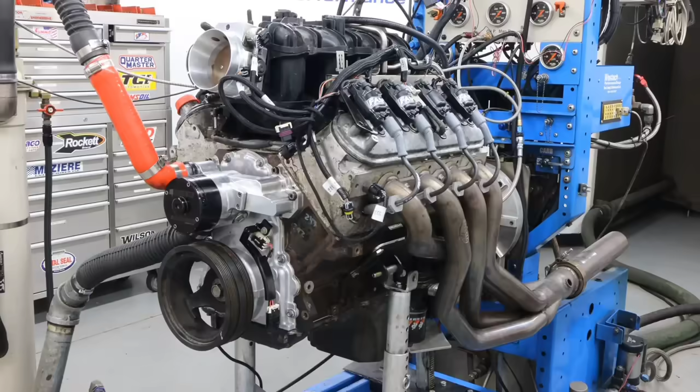A 6-liter LS and you want to modify it. Either you already have a 6-liter in your truck or you have one that you're swapping into something else. So the question is, what should I do? What mod should I perform? What cylinder head should I use? What intake should I use? And most importantly, what camshaft should I use?

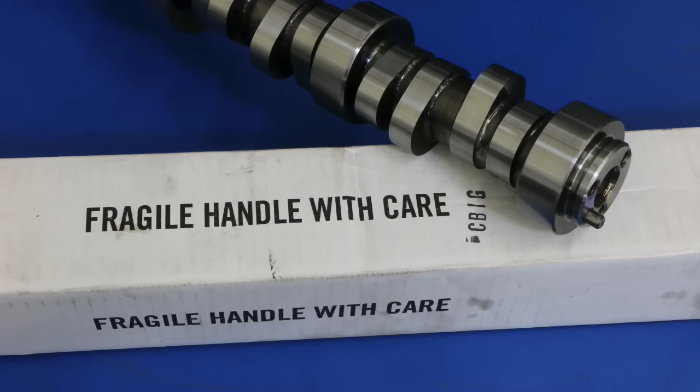How should I modify my 6-liter? Maybe we should do a build-up. How about a couple of different mods? How about 10 6-liter combos? In this video, we're going to take a look at no less than 10 different combinations.

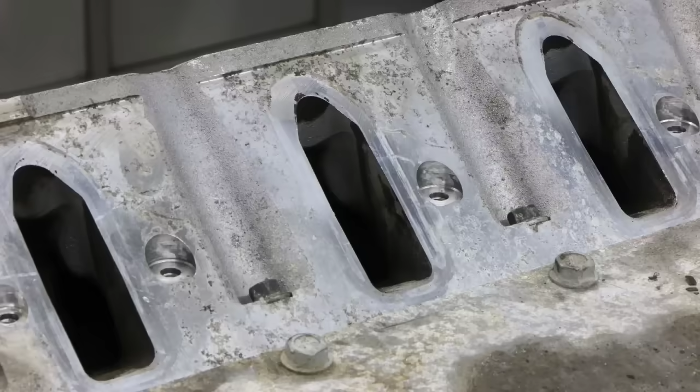I'm going to show you a variety of different cylinder heads that we ran on a 6-liter, a variety of different camshafts we ran on a 6-liter, and even a variety of different intake manifolds that we ran on a 6-liter. We ran Cathedral port heads, we ran RecPort heads, we ran Cathedral cams, we ran RecPort cams, we ran stock cams, we ran all kinds of stuff, so you can take a look at what you want to do to your 6-liter.

Now, obviously, the compression is going to be different on an LQ4 versus an LQ9, and even versus an LQ6. But the reality is, that's not going to change the results. Sure, more compression is going to add power, but it adds power both on the baseline number and on the modified number. So the results of a cylinder head test are going to be the same on a LQ9 because it has a little more compression.

I want to point out something very important here. A lot of guys think that compression works well with one specific kind of camshaft or one specific kind of cylinder head or intake manifold, and it does not. Compression is a lot like boost. It basically adds power everywhere, and we always use a percentage to show how much it adds, but the reality is that's just an easy mathematical formula. Compression adds power everywhere, no matter what camshaft you put in it.

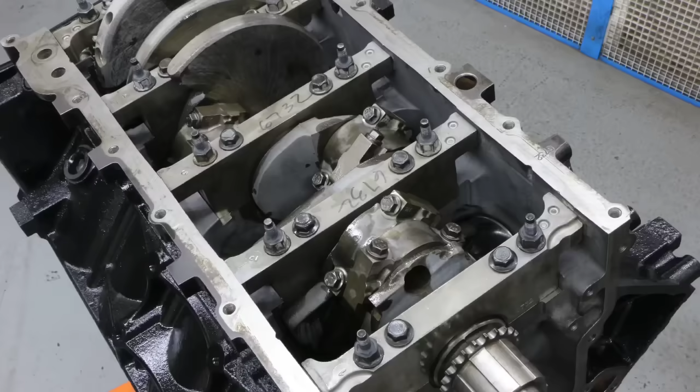If I compare two different camshafts on one motor that has 8-to-1 and the other motor that has 11-to-1, the camshaft change is going to be the same on both motors. It's just going to start out lower and end lower on the motor that has less compression, and it's going to start out higher and end higher on a motor that has more compression. So what I'm saying is we ran all these tests on an LY6 6-liter, but it applies equally well to an LQ4 or an LQ6. Let's get to our results.

To get things started on our upgrades to the 6-liter, we're going to start off with Cathedral port heads, and then for the next one we'll go into the RecPort head stuff, because obviously the RecPort head can be used on a 6-liter, which the factory did on a number of combinations. Now, as I indicated earlier in our discussion, it doesn't matter whether you're starting off with an LQ4, an LQ9, or in this case an LY6. They're basically all the same.

You'll see a minor difference in compression ratio for each one that you start with, but that will just improve both the starting power and the ending power of any of the modifications. The changes from the modifications will basically stay consistent. It just matters the starting point and the ending point. So we're going to start off this 6-liter.

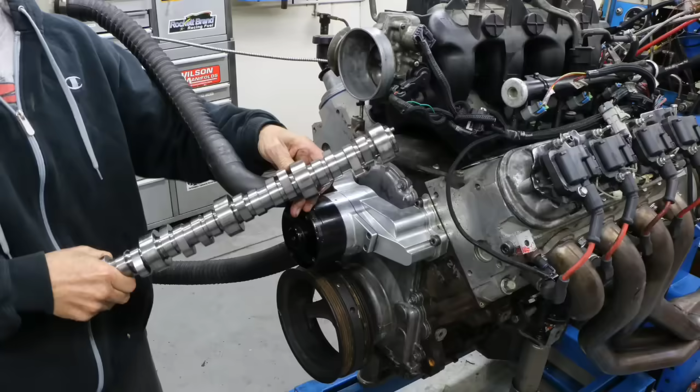It's an LY6 short block, and we have a cam in it because if you're going to modify a 6-liter, the first thing that you should do with any 6-liter, regardless of which one it is, if you want to get the most bang for your buck, is put a camshaft in it. Cam and springs are the big upgrade for any LS. That's what you should start with, unless you're starting with a turbo, which is also a good start even with a stock cam.

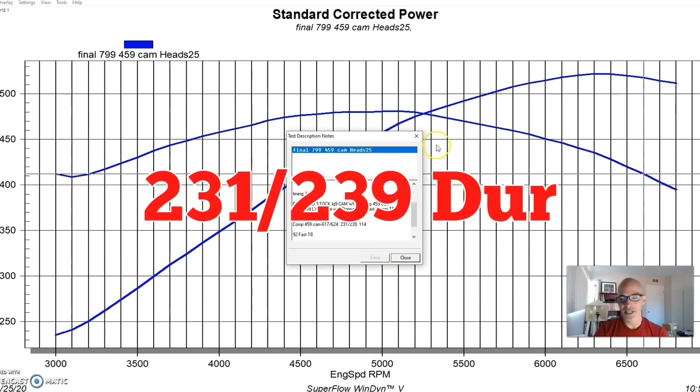But we set up this LY6 short block with a Comp 54-459-11 camshaft, and it's not the go-to 469 cam. It's the Cathedral port version of that, which is a .617/.624 lift split, a 231/239 degree duration split, and 114 degree lobe separation angle. So basically, it's the 469 cam, but with less exhaust duration.

And don't worry, I'm going to show you a comparison between this and the other cam, and it's not really very much different because they're both really kind of similar. So what we did was we got things started by installing a set of 799 heads. Now, the 799 heads, for guys that don't know, 799, 243, basically the go-to high-performance factory Cathedral port head.

These work really well, and actually on a 6-liter, and I'm going to show you the difference between the 799 and the 706 head, these might be as good or better choice than the smaller 706 head on this bigger 6-liter. So we ran this thing with 799 heads, and I put a Dorman LS2 intake manifold on it, which you've seen in any of my other videos or the stories I did on it.

The Dorman LS2 is basically the functional equivalent of a Trailblazer SS. It's just a lower profile and it fits. When I compare the two back to back, the whole power curves are almost identical. There's a little bit of wiggling here and there, but basically they're the same kind of thing. This Dorman LS2 works really well. We had a 92mm throttle body on it, 1 7/8" long tube headers, and tuned all of these combinations with the Holley HP management system.

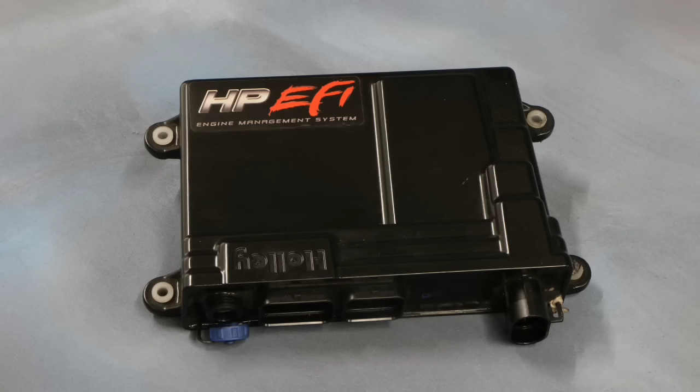So run with the stock 799 head. The only thing we did was put valve springs on it. No milling, no bigger valves, no porting, no nothing. Just an as-cast stock 799 head with valve springs on it. Run with those heads, our 6-liter produced 522 horsepower and 481 foot-pounds of torque.

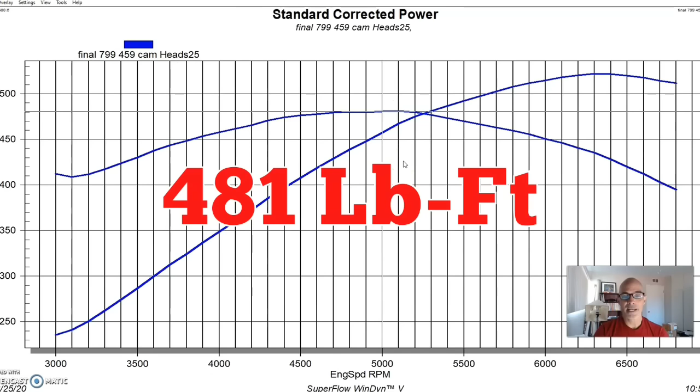So now I know what you guys are thinking. Okay, well, what if I had a 6-liter and I wanted to upgrade 317 heads, which, by the way, we should address the elephant in the room. 317 heads you should just get rid of unless you're running boost, and I'm sorry if I hurt the feelings of all the 317 guys out there. But in terms of all the factory heads, that's low man on the totem pole. Because of the compression, it makes the least amount of power of any of the factory heads, and you can see that in any of my other videos.

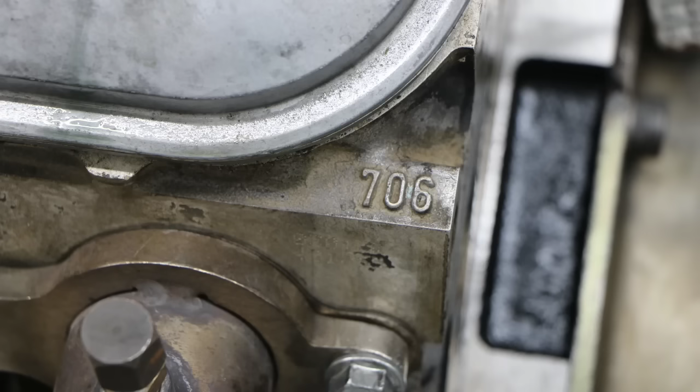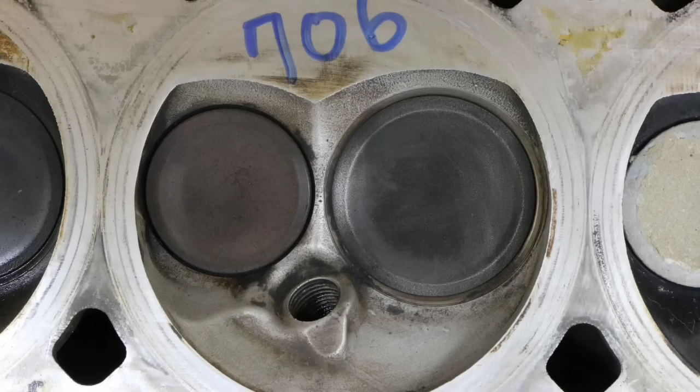So if you're going to upgrade that head, the easiest and least expensive choice is to put a set of 706 heads on from the 5.3, because people will just give those away. Although maybe not after all the videos I've done. But here's what happened when we replaced the 799 heads with 706 heads. So the 706 head made more power than the 799, up to about 5,000 RPM.

And out here at the top, from about 5,900 on out, the 799 head made more power, because on the 6-liter, unlike the 5.3, which the 706 head is a much better choice, on the 6-liter, the bigger bore and this power output, and that's very important, this power output can take advantage of the extra airflow offered by the 799 243 head. They flow a little more than the 706, and they work well on the bigger bore, so that combination allows them to make a little more peak power.

Although down low, they didn't make as much as the 706 head, and everybody points to compression, but we were only talking about around 3 cc's difference between these two heads, so this is not all compression. People need to realize that that's also a combination of the smaller valve size and the port volume and the chamber shape, and there are other things that make this 706 head enhance power in this RPM range.

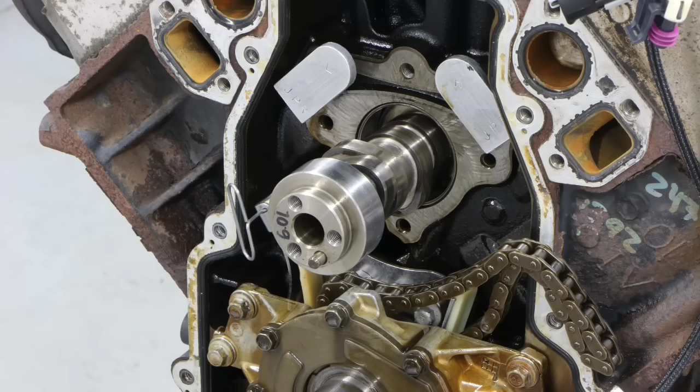So now let's take a look at the other modifications we did to our 6-liter. After comparing the 706 and the 799 heads, we'll get rid of our 706. So you're probably asking yourself, hey Richard, what happens if I want to upgrade the heads on my 6-liter? What can I do to improve the power output compared to a set of 799 heads? And obviously you could put more camshaft in this, although there's a limit with the available piston to valve clearance, and something in the 231 or so degree intake duration, which is usually the valve that's going to hit first, depending on the lobe separation angle and the valve events. You have a limited piston to valve clearance, so there's not a lot more that you can get from the camshaft.

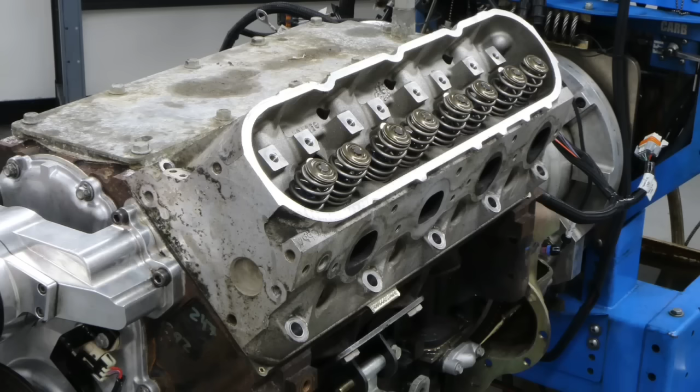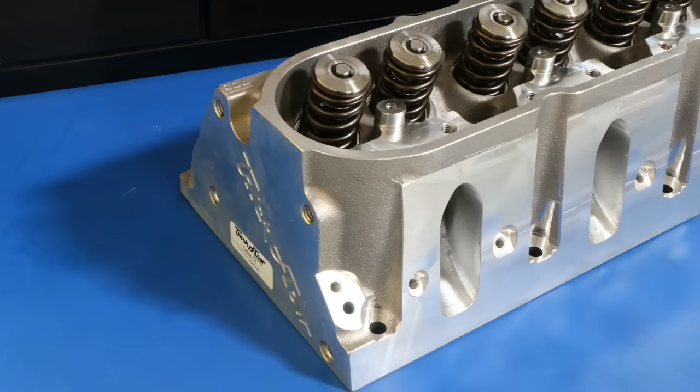So what happens if you upgrade the cylinder head on this? A natural upgrade for this would be to go to an aftermarket head, and what we did was put a Trick Flow head on it. So here's what happened when we put a TFS 225 head in place of the 799 head. And you can see we picked up quite a bit of power. Power output jumped from 522 up to 560 horsepower. And in this case, we ran the Trick Flow 225 head with the same Dorman LS2 intake and 92mm throttle body.

But here's another interesting test, and it shows the gains of an intake manifold when you're talking about this kind of power level. The factory intakes obviously were not designed to work on a combination that was making over 550 horsepower, although they're doing pretty well. And the Dorman version actually is pretty good. But here's what happened when we replaced the Dorman intake with a FAST intake and with these 225 heads. And as you can see, there were big gains starting at 4,300 RPM or so.

So if you're looking for that last little bit, the FAST manifold, I know it's more expensive than the Dorman, but not so much anymore. I think they've raised the price on the Dorman, and they're much more money. So I might spend a little extra and just get the FAST to begin with, especially if I was going to upgrade the cylinder heads.

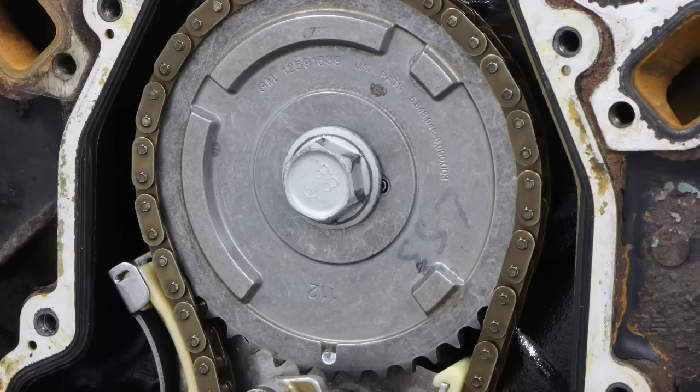So on these combinations, what I want to do is show you what happens if we did a little bit milder stuff, and then we can work our way up to a lot more camshaft. So the first thing I did was, what happens if I wanted to put an upgrade with like one of the stock cams? So what we did was put a factory LS3 camshaft in here. Let's see, here we go.

So equipped with the LS3 cam, the power output jumped to 475 horsepower, which is a fairly good gain, especially past 4,500 RPM, it picked up power. But compared to the factory LQ4 cam, it lost power down low, and we see that almost all the time. When I compare the LS3 camshaft to like the LM7 camshaft, we saw the same thing. It loses power up to about this point and then gains power afterwards. So you're trading power. So you guys have to decide, is that factory camshaft upgrade really what I want to do, or do I want to go to an aftermarket cam?

And here's what happened when we put the camshaft from Trick Flow in it. Basically, it was the sloppy stage 2 camshaft, so it was like a 228-degree duration. Here we go. So that was actually a good upgrade compared to that factory LS3 cam. The peak power jumped up to 513 or 514 horsepower. Peak torque was up to 493 foot-pounds, and it gained power even over that mild stock cam, even down as low as 3,000 RPM. So that's a fairly good upgrade if you want to pick up power everywhere. It picked up a good amount. We're over 500 horsepower, 514 horsepower.

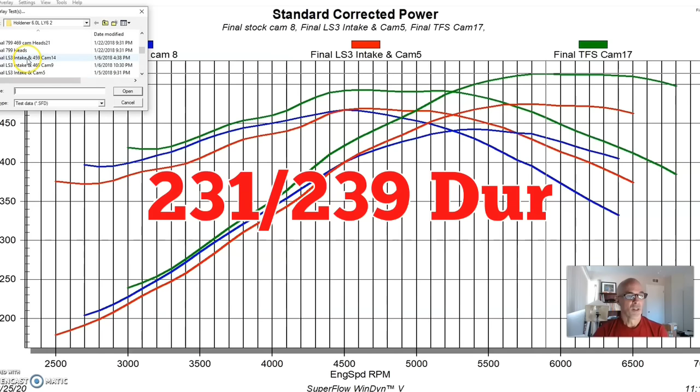But here's what happened when we put something a little bit bigger cam, like the 459 or 469 camshaft in here. So here's the 459 camshaft, and as you can see, big gains past 5,200 or 5,300 compared to that sloppy stage 2 cam. Basically big gains compared to the factory cam. It kind of fell below the factory cam below 3,500 or 4,000, but picked up power from 4,000 on out and ended up making a peak power of 541 horsepower. And here's what happened when, instead of the 459 cam, we put the 469 camshaft in.

And again, it did kind of what it did in the last test on the Cathedral port heads. It lost power down low here in the 3000 range, picked up power out here past 6500. Everywhere else, it was basically identical. So there's fundamentally no difference unless you're revving the thing way out or care about the idle quality and the low speed stuff. Then maybe the 459 cam is a better way to go.

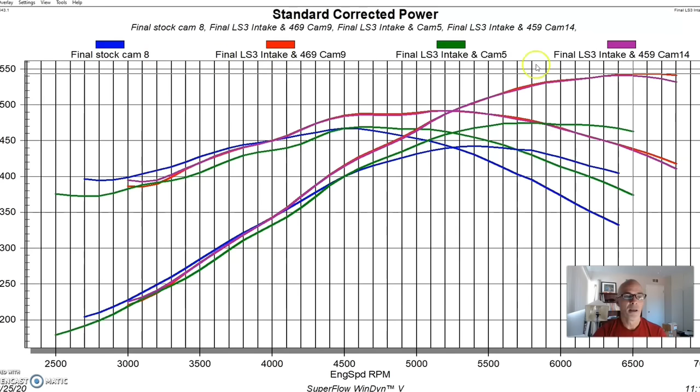But here's what happened when we ran. So this is what happened if you ran a factory LY6 or LS3 head upgrade on your cammed 6-liter, whether it's an LQ4, LQ9, or in this case an LY6, which in that case it's just a cam upgrade. But in the others, it would be a cam and head upgrade. And by the way, the peak power was 543 with a 469 cam. But now you're probably wondering, well, hey, Richard, how does that compare to the Trick Flow headed Cathedral port? Well, let's take a look at that.

And as you can see, the ultimate combination with the Cathedral port stuff with the Trick Flow head and the FAST intake manifold made 576. So it's still better than the factory rect port head. And here's the comment I always get when I run this kind of test, because I posted this before in another video: yeah, but what about if I put a FAST intake on the rect port heads? Well, unfortunately, the FAST intake on the rect port head does not gain power like it does on the Cathedral port head. In fact, it probably would show no gain at this power level on these rect port heads. So it would be the same curve.

The factory LS3 intake manifold or the LY6 intake manifold is really hard to beat, as FAST guys have found out. And that FAST LS3 just doesn't really add power there. So this is still a good comparison, because actually the Dorman intake, if anything, I think holds it back compared to the factory LS3 manifold on the other combination. The Trick Flow 225 heads are just a better head than the factory LS3 head is. Now maybe you could put a ported rect port head on there, especially one that was milled to have the right compression, then you could get that up to the standard.

But I'm not comparing those two things. I'm not telling you which one is better. I'm just showing you this is what they do, and these are the kind of power gains that you can get if you run these combinations, because they work very well. There's obviously more power to be had from the factory head, because we've made almost 700 horsepower, I think, with those combinations. So you can definitely get a lot of power out of it on the right combination. But here's what happens when you upgrade your 6-liter. Let's get to our conclusion.

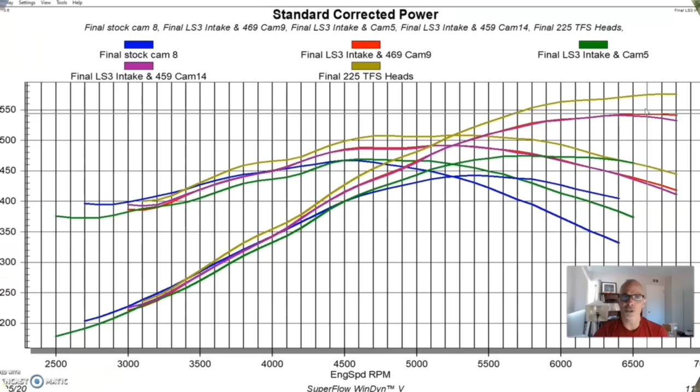Okay, guys, what'd you think about all those test results on our 6-liter LY6? As I said, you could apply that equally well to an LQ4 or an LQ9, but on the LY6, we did a lot of testing. We compared a bunch of Cathedral port heads and a bunch of rectangular port heads and a bunch of camshafts and a bunch of intake manifolds. Did you guys get any ideas for the stuff that you want to do to your 6-liter? Is there something I missed? Is there something else I should test?

Now, here's something important. I wanted to try a camshaft that was between that sloppy stage 2 and the 459 or the 469. You can just draw a line in between those two and pretend that we did that, because that's exactly what's going to happen. Same thing with the milder stock cams. If you look at videos I did on all of the stock cams on the 5.3 liter and you see the difference, that's going to be the difference on the 6-liter. It's just that the crossover point for some of these wilder cams is going to be shifted down a little bit in the RPM range. It works a little bit better on the bigger motor, and that's all that's going to happen. So all of these modifications should give you a good idea what to do with yours.

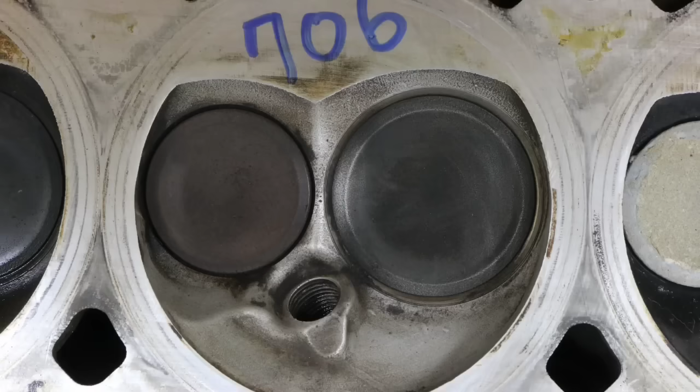Sure, if you want to put a specific camshaft in there like a truck cam, I know guys are going to say, I want you to do a torque one, I want you to do a 6-liter to maximize the torque. And believe me, I have that coming. I'm definitely going to do that. We'll do a small torque cam and the 706 heads, and we'll maybe mill them and do the chamber openings and all that stuff. So all that stuff is coming up. But for right now, this should give you a really good idea what to do with your 6-liter.